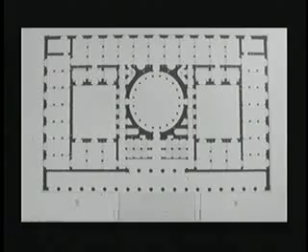But the evolution of this, I think, was significant, because we went back and looked at the prototype of the traditional museum. This is Schinkel's Museum in Berlin, 19th century, in which you see the rotunda, like maybe the National Gallery in Washington, very similar, a rotunda at the center of the building, at the heart of the building, galleries surrounding the public space, and basically blank walls or windows which ended up being blocked because galleries don't work very well with windows, so that the sense of the 19th century museum is an introvert building.

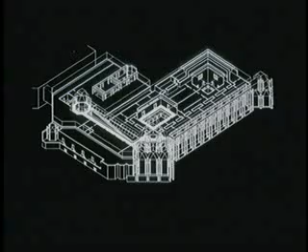It's mysterious. Its public life is internal. It is an elitist place. It is not a place to be open to the public at large. It wasn't intended to be truly a public place. And in contrast, the National Gallery plan, and you see here the axonometric of the plan, inverts the museum. It puts the public spaces at the perimeter. It places the galleries within the public spaces. In other words, it says these public spaces could be transparent, could be open to the city. They are inviting. They kind of protect the collection of art within it, and so this kind of inverted plan leads to a sequence of spaces which is very different to the traditional museum.

And I realized as we worked on it, designed it, built it, and now it's been out there for almost 20 years, that some of those strategies actually worked. For example, the sense that though you enter the building without ascending any steps, amphitheater-like spaces in front of it become places of activity, and it often is active. And that then there is a sense of processional, a kind of a ritual, so that there is this kind of division between daily life in the city and the experience of the collection within, and so you ascend to the Great Hall.

And then the Great Hall becomes a kind of an urban room. It is shaded as the sun comes out. It can be modified acoustically by bringing out these banners when there's a concert. And that space is not only conceived as the hall or foyer of the museum, but it really becomes a place of continuous activity. Concerts, receptions, all the heads of state dinners that occur in Ottawa now occur in that building, to the point where it's become even a conflict between the museum and the Prime Minister's office, because it has been kind of embraced by, in fact, a book has just come out criticizing that my architecture is excessively monumental and sacral, if I got it right. Proof the politicians took the building over.

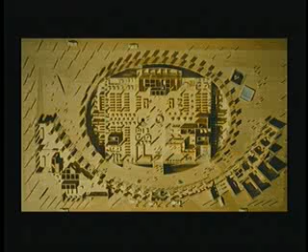So what evolved is, again, a term I've used before, we created an urban room. We, in some ways, inverted the library plan. We created the central block, within which you had the stacks and all the services, contained by a reading gallery, and then contained by an urban wall, which contained this room and series of piazzas. And you could enter the building from any direction and into the urban room, from which you cross the bridge into the library control zone.

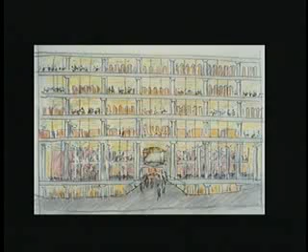And so the building became a combination of the reading galleries, which you see on the left, surrounding the block of stacks in the center. And as you came into the urban room, like a menu, you would see all the departments. Everything that's accessible in the library became clear. So you sort of get drawn into the building.

And here, the urban room, the transparency into the various library departments, lined with shops, cafes, bookshops, etc. And early in the morning, this room fills up, people waiting just by the bridge, and as the library opens at 9 o'clock, they all stream in, all to grab their favorite seat within the library. The reading galleries, as seen from the stacks across, and always looking out to the view of the city and being visible from the city. And activities just emerge in those spaces, both in the outdoor piazzas and in the library itself.

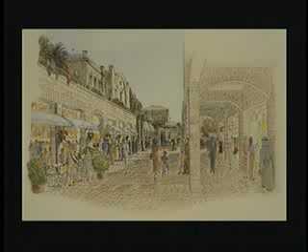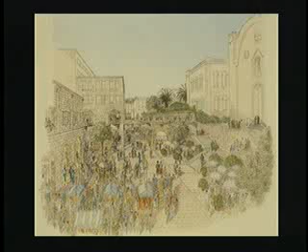And it's been a long process of construction, development, debate. Won't go into it in detail, but you see here in part the residences as seen from the city walls, with the King David Hotel in the background, our own Citadel Hotel, which is part of the complex that opened some years ago. But most significantly, and yet to be totally realized, currently under construction, are the pedestrian paths that connect the parts of the city, which are not a mall, but really pedestrian streets, integrating some of the older buildings and new construction, and basically bringing in retail and cultural facilities and some institutions to create this fine mixture of what can make a vital urban place.

Next to this is the Hebrew Union College, and I think that's relevant in terms of the evolution of ideas about places of education, because the college in Jerusalem, this is ironically an American college in Jerusalem, was an opportunity to think through the notion of place for education.

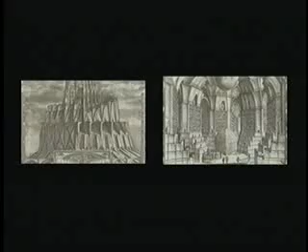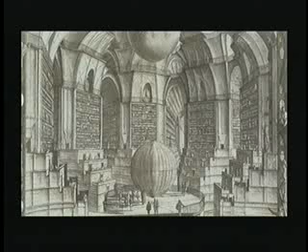And these probably go back to more ancient memories. These are fantasies of libraries, illustrating Borges' book on his fantasy of a library, also having this extraordinary sense of going back to the origin of the notion of library, Library of Alexandria, the library in Ephesus, the storehouse of culture and knowledge, and the place of scholars and so on, and then bringing us all the way to the 21st century in terms of the library that serves the entire population of a city, including everyone, including the homeless, including those who are formally or informally dressed, a library for everyone.

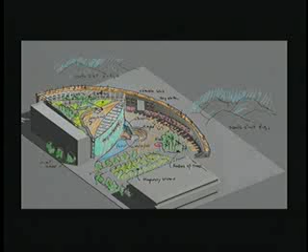And I go back to one of the early diagrams of the building in which we showed, this is the existing library, a building entered at the corner facing the downtown, forming a great piazza, a wall that descends and surrounds both the library and that piazza, but to give that wall more meaning, not only is it lined from one end to the other with shops, cinemas, cafes, etc., but it's a climbable wall so that you can actually ascend it and come all the way to the roof, which is a great park, reading garden that faces the Wasatch Mountains all around, and forming a network of spaces, the roof garden, the piazza, and the urban room within, as the kind of public spaces within which the library proper functions.

And to explain this in plan, here's that wall that surrounds the block. The blocks in Salt Lake City are 600 feet square, the largest in the country, as are the streets, wide enough for the coach to make a U-turn. You'd think that by now, given that we are back to cars or into cars, there could be some treed medians in the center of these very wide streets, but that is yet a battle to be won.

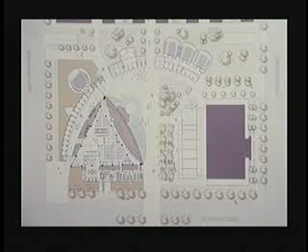But here we extended the program. Not only is there an auditorium, but we proposed adding art cinemas to attract younger people and adults at different times, larger shops, a large park, and many new community uses in the existing library. And that mix of quasi-commercial, quasi-cultural, quasi-entertainment, and the library itself seems to really be at work.

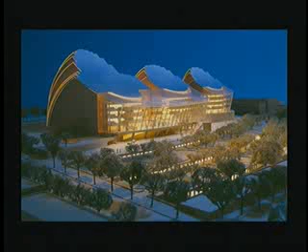A concert hall, an opera house, and a theater sitting on a large city block which connects the downtown back there, and the Crown Center, which is an extension of downtown. And so in many ways, a pivotal project in terms of connecting two parts of the city that right now are cut off by a freeway, which is right behind us.

And we decided to have all the public spaces of the complex facing south towards the Crown Center, and to make them totally glazed and transparent. So in a sense, we are placing these buildings side by side and then creating a large sheltered space in front of them. The parking is terraced into the park in front, and people are ascending into the complex.

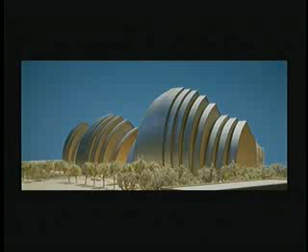And whatever performances and other events are going on in the building, being absolutely on the escarpment, visible from anywhere in the city towards the south, and a very dramatic view from what is generally the back of the theater, the stage tower, as seen from the north.

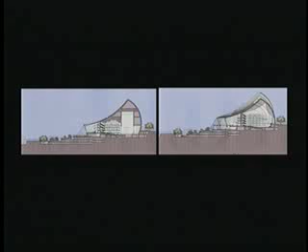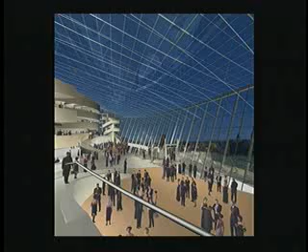The cross-section that explains how this series of undulating geometries creates this tensile structure of cables and glass, which enclose with total transparency the public spaces within it, and the series of public spaces as they connect one theater to the other and create the sense of ritual of performing arts that I think, again, is something that people crave for.

And just to move in scale, I'd like to say a few words about a city we've been working on for the past, I think it's 12 years, the city of Modiin, which is halfway between Tel Aviv and Jerusalem in Israel, a city that was built from scratch. I should emphasize for those who do care that this is on the Israeli side of the Green Line. It is not a settlement. I have not designed or built any settlements, and would refuse to do so if offered.

Very hilly land, as much of the land above the coastline is, a series of valleys that go east-west, and ridges that follow the orientation towards the sea. And the question here, doing a new city from scratch, an automobile city, if you will, although it would be well served by a train system and public transit, is can we recreate that sense of street, of urban activity, which has certainly been a quality totally lost in the Israeli new towns built between 1950 and recent years,

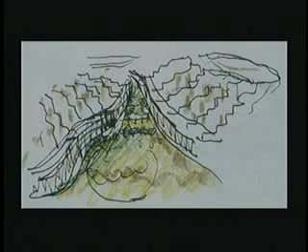In other words, each valley would become such a spine, defined by housing that forms its edges, one-way traffic arteries on either side, most of it being park, schools, shops, community facilities, all within the valley. And as you see, since the series of valleys actually converged at one place, at that one place where all the valleys meet would conveniently be the town center. And abutting to that would be a nature preserve, so that the untouched nature, the town center, and the spines that radiate out become the place of community. Everything else thereafter hardly matters, although we do care.

And in the sense that though we did not design a single building in this town, we defined the massing, the parking solution, the essential landscape features in plans that were rather detailed at the scale of 1 to 500 and 1 to 250 metric, which then many developers and many architects interpreted and built for the private sector. All of the city was built by the private sector. And there is no subsidy in it because it is the land proceeds that finance the infrastructure, the land being publicly owned.

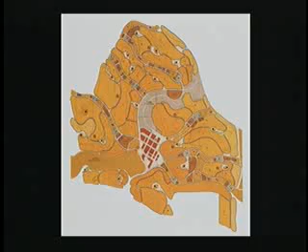And so you see here the basic zoning plan with each of these valleys being a spine of its general district. I don't even want to use the word neighborhood because the neighborhoods here overlap, and you see them converging into the town center, and here's one of these valleys and the second one and the third one, each of them being inspired by Beverly Hills, we have to confess. Each of them is with its own species of trees. There's the valley of the pine trees, the valley of the jacarandas, the valley of the palms, and these are old pictures by now. The trees are getting there, and the identity of each district is very much associated also with its plant life.

And it is the shops and the schools and many of the facilities, and then connecting all of these uphill across the topography, against the grain of the topography, and within the topography that forms this grid of community life.

Which brings me to the Eleanor Roosevelt College. I don't have elaborate photographs because I'd rather you go and see it in real life, but I just want to talk about some of our preoccupations and some of our strategies, and I guess in the next few years we will find out how well they have worked. But this is the plan.

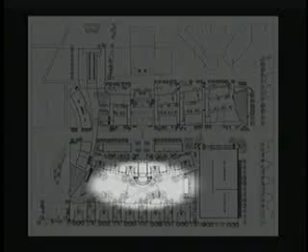We are there. Great hall, dining hall. I don't know if my proposal that this be called the Common has been adopted. Is it the Common or is it something else? The Green? Or the Green, okay. In San Diego it should be the Green.

And then this needs a name. Ricardo suggested today the Paseo. Does that go? Paseo? Promenade? I don't know. But I want to go back to the master plan, which existed before we were hired.

And the master plan proposed for the college a series of quadrangles. If my memory serves me right, there were 5 quadrangles. So each sort of formed a cluster of buildings within which were courtyards. But at the end, it was 5 things, 5 clusters. Very strongly divided by Scholars Drive, in spite of its esteemed name, a big problem, of dividing the site in 2.

And then there were neighbors who one had to be concerned with. But my main concern in observing the master plan was that it missed the point that Eleanor Roosevelt College was a place, a community, which wanted to identify itself as a community within the greater community of the campus.

And after all, that is the principle of the Harvard houses and the Cambridge houses, and going all the way back to the notion of creating a sense of a community within a community. And that means adopting physical strategies that make that possible.

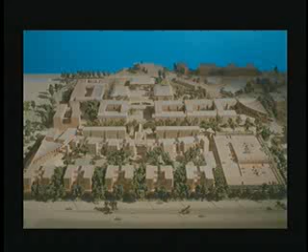And that led us to conclude that there should be one very large space, a common, a green, of the scale of the spaces of, say, Harvard Yard or across the river, the Harvard Business School Common, which are large enough that they can become ceremonial places of the college, culminating with the dining, and then a more linear space, I might call it more bazaar-like space, which

originates at the Provost building and extends all the way to the International House Great Hall, with very clear gateways. One gateway at this corner, a gateway into the college at this point, and accepting that we are an automobile society, also a gateway of the garage, which we worked so hard to integrate into the landscape and lower it and make it as invisible as possible.

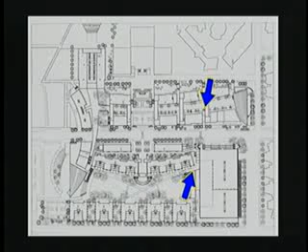And it is these spines then crisscrossed by east-west spines, particularly this one which bridges the street. This used to bridge it, but got value engineered is the term. We get more value by eliminating the bridge, but we had to meet budgets. And the third spine, the third path that connects this way, so that in a sense, downhill and uphill, strong

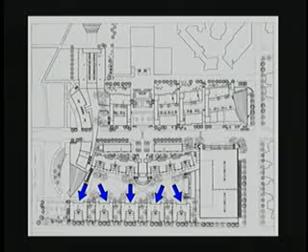connections across the topography, strong, very clear spaces, and then all the lounges are studied. Every one of these buildings has a lounge. This lounge, my nickname is the laundry clubs. Laundry clubs here and there. They really are very club-like.

And all this, and classrooms, all opening into this public domain. And then circulation, that is stairs and elevators and so on, always looking into these spaces. So you sense the movement of people coming in and out of the buildings as you are on the campus.

And then going beyond that, trying to give the students the kind of amenities, like each of the residences has a roof garden. The roof gardens look into each other. They're connected by secondary means of stairs, so you can jump from one terrace to the other. And we all fantasize how wonderfully they're going to be used and what outrageous things are going to occur there.

So it's time to, I think, conclude. I'd just like to take this back a little bit to relating some of these thoughts to where the profession is today, the profession of architecture. Because it seems to me that this is a period very rich in isms. Postmodernism, deconstructivism, I mean, they just follow each other. And it used to be that they sort of followed the world of fashion in terms of the rhythm. They even accelerate to the point where what's in changes even faster than fashion.